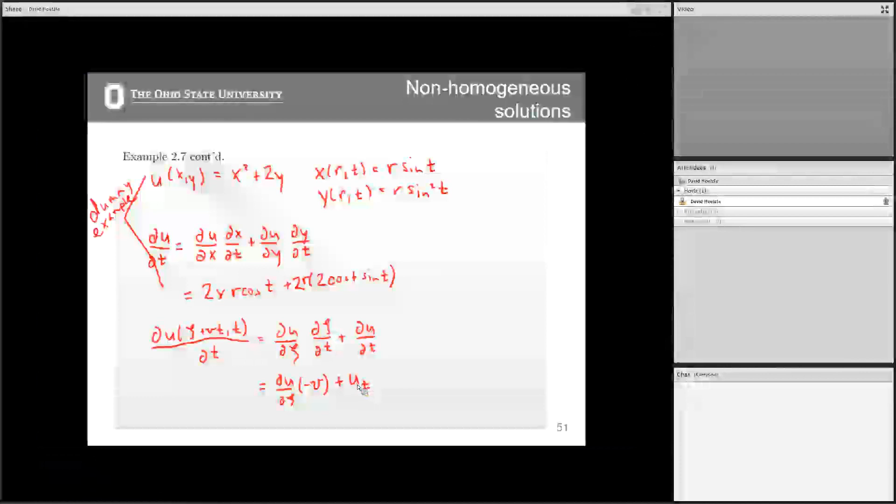And then we have partial of u with respect to t again. So partial u with respect to t now becomes partial u with respect to zeta times negative v, plus partial u with respect to t. Any questions about that?

Okay, so if we look at our partial differential equation again, this covers this term right here. We now need to handle this term, the second partial of u with respect to x. This one's considerably easier. If I look at this, it's going to be partial u, where u is a function of zeta plus vt, partial x squared. Sorry, I'm skipping steps here.

Let's do this just for the first one. The first time we do this, it's just going to be partial of u with respect to zeta, times partial of zeta with respect to x. If we go back to our definition, partial of zeta with respect to x is going to be equal to 1. So then we're going to get partial of u, partial zeta, times 1. This one's easier than the other one.

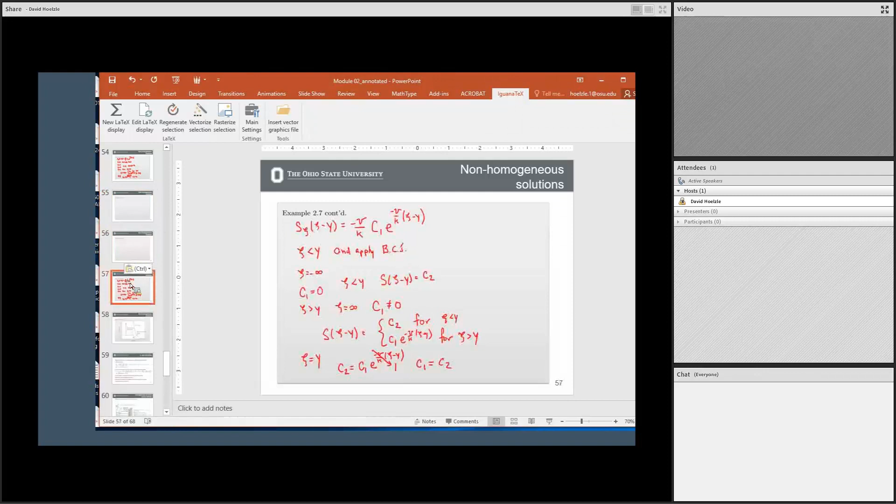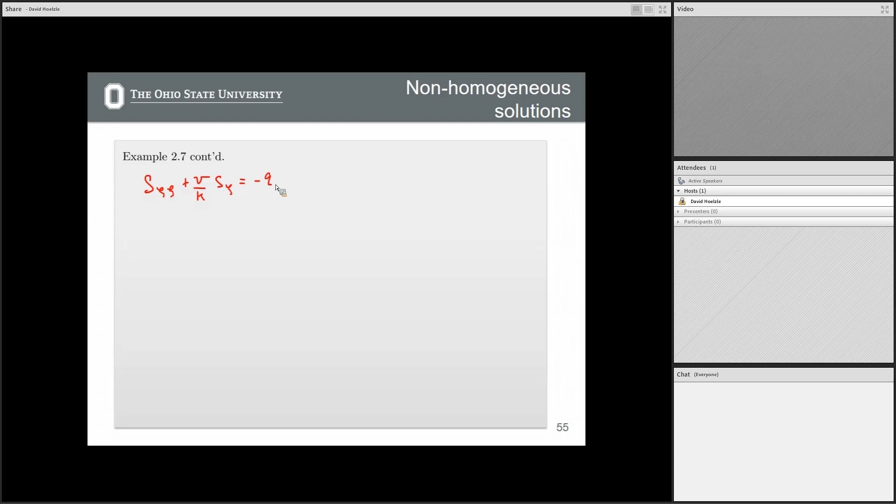Okay, so our original differential equation was this. If I integrate both sides over the infinitesimal width of my Dirac delta function, what I get is the limit as epsilon goes to 0 of these terms.

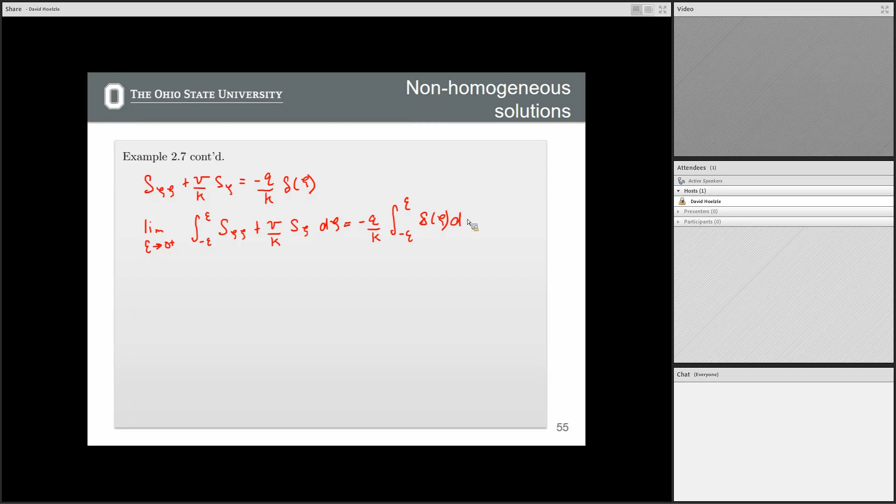So this may be some review for you - you'd have to go back to your systems classes in undergrad or differential equations classes from undergrad. But a fundamental property of the Dirac delta function is that the integral of this function, even if it's infinitesimally large, from negative epsilon to epsilon is equal to 1. So we know that this whole integral is going to be equal to 1. All right, so the right-hand side is going to be equal to negative qk.

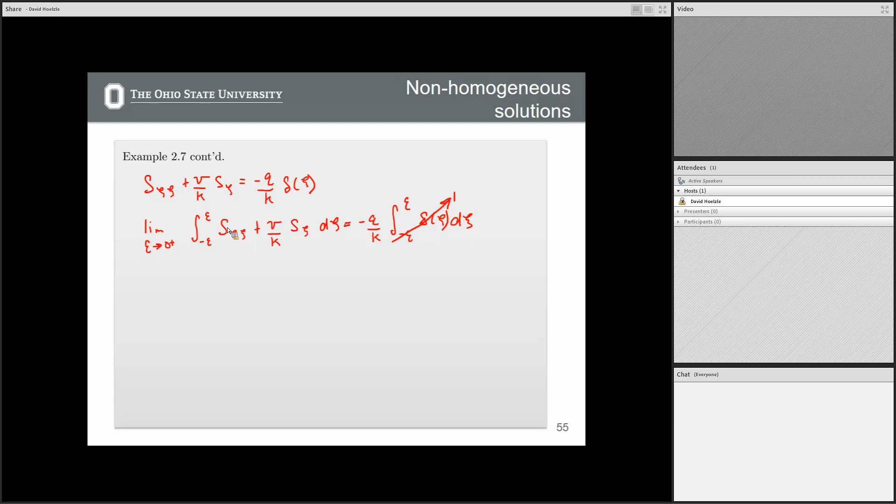Left-hand side, we can apply some basic principles of calculus. So we know that the integral with respect to d zeta, when we have a derivative with respect to zeta - here this happens to be the second derivative - but basically this is just the same as taking one of these derivatives with respect to zeta, right? Just like the fundamental theorem of calculus.

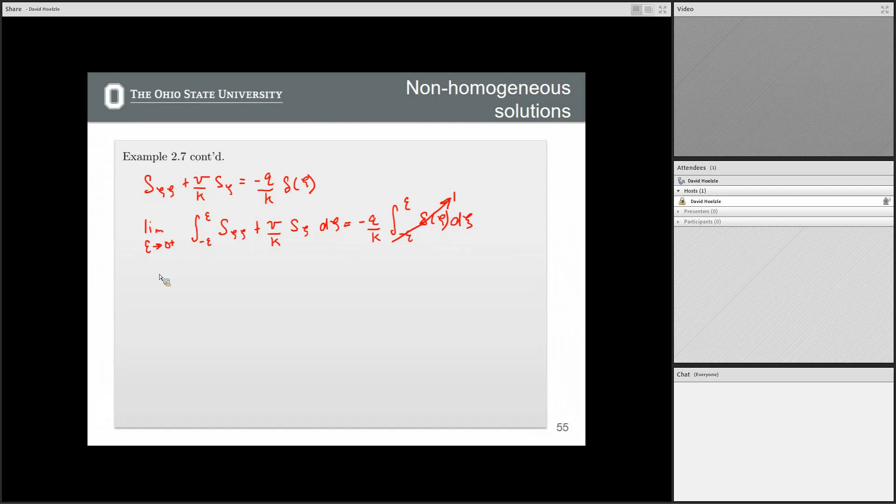So if I look at how I evaluate this, I now say limit epsilon going to 0. This term right here becomes s zeta evaluated at positive epsilon minus s zeta evaluated at negative epsilon, plus then vk times s evaluated at epsilon minus s evaluated at negative epsilon.

Okay, so going through these different terms here. So we know from the work we did in the previous slides, we already evaluated this for basically the partial of s with respect to zeta, and now we should evaluate this at epsilon, which is essentially 0. Right? So this is still limit epsilon going to 0, negative vk.

This is C1, right here. This one, right? So we said that for any time in which the argument of this function is less than 0, the function is just plain C2, right? So the function C2, taking a partial of C2 with respect to zeta is going to be equal to 0. That's just a flat function, right? So we know that this side here is equal to 0.

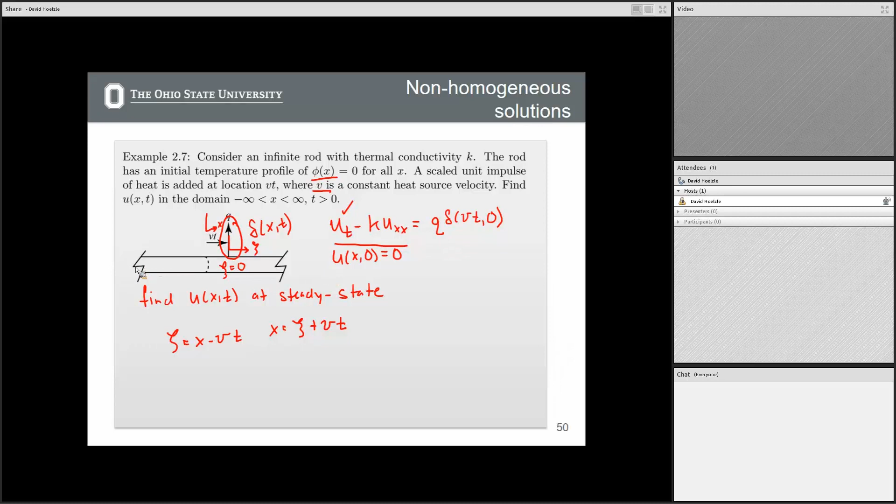So just going back, trying to map the problem to this: this is behind the heat source after the heat source passes, and this is all in front of the heat source.

The other thing to keep in mind is as your velocity gets slower, for constant Q, the heat taken up by the rod becomes higher, and therefore the temperature is higher, which makes sense. If you have constant heat rate and you're moving along slower, it's going to heat up the area for a longer period of time. So this is increased rod temperature as the velocity slows down.

It also allows heat to diffuse forward a farther distance. Whereas if you're moving really, really fast, the area of the rod doesn't heat up as fast because the amount of energy per unit time going into that area is lower, and there's also a faster decay in terms of how heat propagates in the forward direction.

We'll directly see the implications of this for the paper we're going to talk about, and we'll see this again when we get to powder bed fusion processes and other additive manufacturing processes as well. Any questions about this problem?

Yes? Translating this - is it typically a higher velocity or lower velocity when you actually apply this? Is it because of the material you're trying to process? Yeah, so it's very dependent on the material.

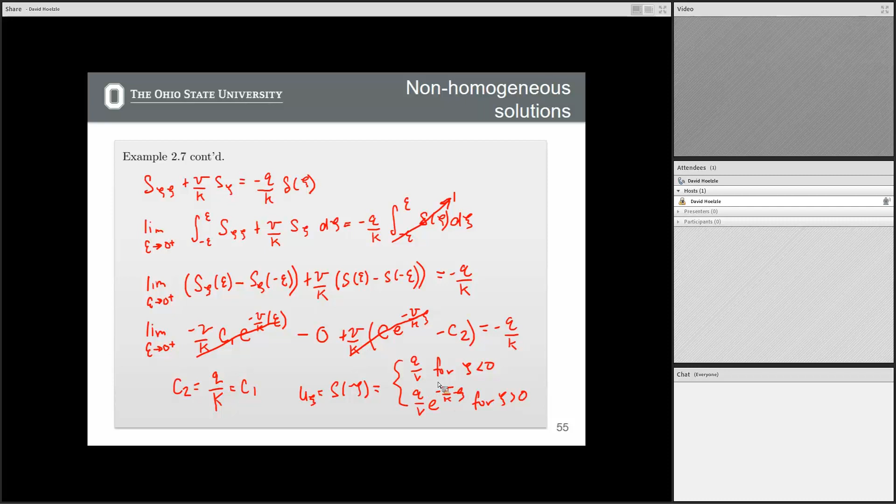This right here, I'm not showing the change or how this temperature response changes with Q, because that's a very linear relationship if we go back to the equation - the height here is linear in Q. It's not so nice and clean when you look at velocity, since velocity in terms of the decay rate is in the exponential, so that's a little more difficult to plot, so I plotted that one.

But basically your two knobs are going to be the power of your laser, which is your Q, and also the velocity at which you scan your laser. So they're the two main things you can control. There are other things you can control, but those are the main things that technicians and engineers in additive manufacturing look into.

All right, so this is the 1D problem. But when we're doing additive manufacturing, we're building three-dimensional parts, right? So we have to get into higher spatial dimensions when we talk about PDEs. Here's the diffusion equation for higher spatial order.

It looks very similar - you still have this term the same. This term becomes a little more complicated: instead of having the partial of u with respect to x squared, now we also have terms in the y and z direction, and we can have non-homogeneous terms in x, y, z, and t all included here. Our domain, if we're talking about the infinite domain, which is what we were discussing for the previous problem, you can see the domains listed here going from negative infinity to positive infinity for each. And then we can also specify initial conditions for the temperature in x, y, z as well.

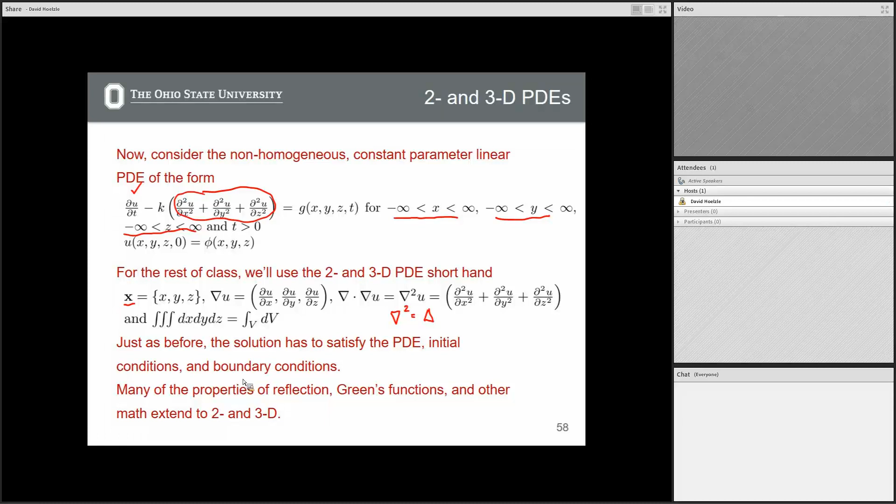Just as before, the solution has to satisfy the PDE, initial conditions and boundary conditions. Some of these ideas that we talked about in one spatial dimension, we're going to use these in 2D and 3D for additive manufacturing processes as well, and I think they'll become a little more clear. I'm going to go through two examples in 3 dimensions that I think will help solidify this idea.

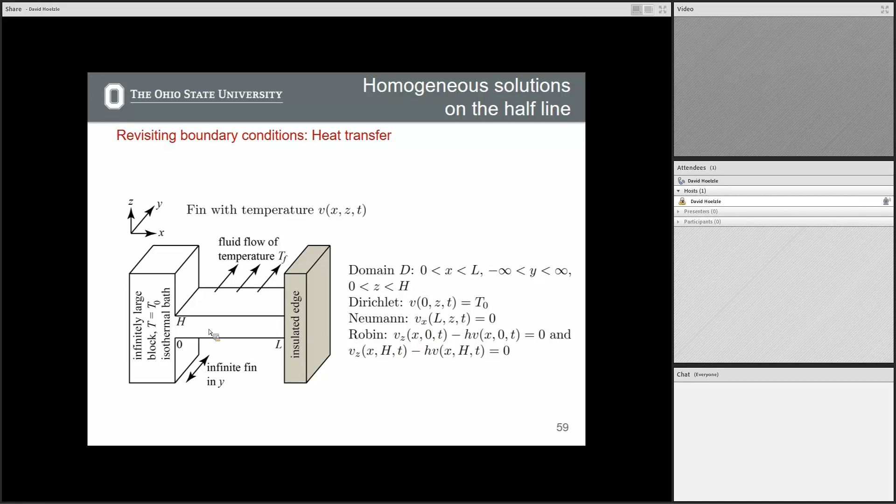Boundary conditions for heat transfer. This is a slide that we have seen before already. I showed a simplified version of this. This is basically a repeat of that. I don't think there's anything new, but you have to consider boundary conditions, and we're going to start with this example here.

This example is very similar to the one we just looked at, but there are going to be some differences, especially the form of the Green's function. We're not going to derive it like the previous example. Here we're going to take it from a table, or basically the previous work, but you'll see how this can be applied.

So before we consider the infinite rod - no infinite rod exists, this is probably even more abstract - we're going to consider an infinite body, which I'm denoting by this cloud. Picture you have this infinitely large block of metal, and somehow you're able to put a heat source somewhere in the middle of that block of metal. Probably not too realistic an example, but it's going to be instructive for when we get to a more realistic example. So anyhow, infinite block of metal in all directions. That means our domain goes negative infinity to infinity in the x, y, and z direction.

This heat source, again, is moving along the x direction with velocity vt, and it's not moving in the y or z direction at all. So if you look at our coordinate axis, this heat source is moving along the x direction, and we're trying to understand what is the temperature inside this block of material.

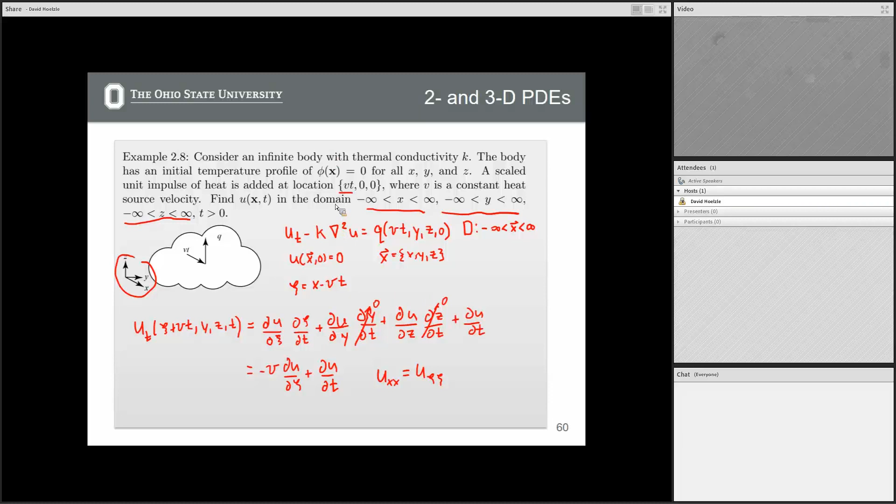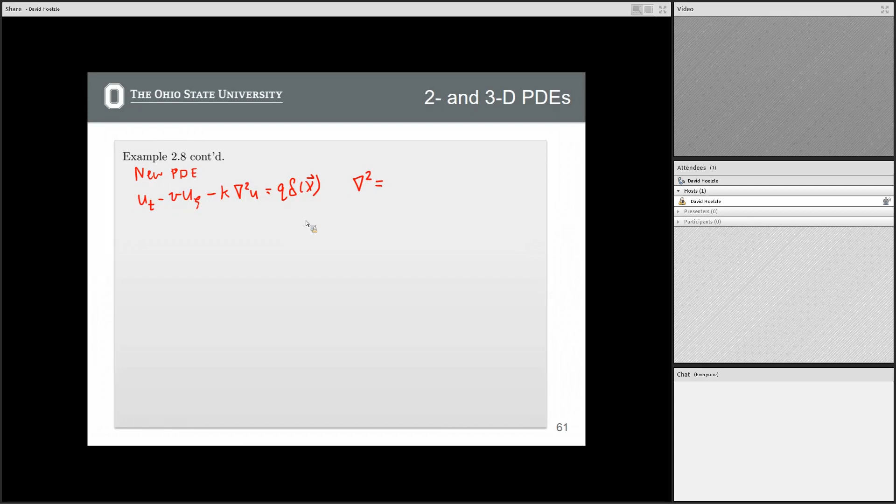So our new PDE is going to be this. We have to redefine what we mean by the Laplacian squared. So before we were in the coordinates of x, now we're going to be in the coordinates of zeta.

Our triad of spatial variables is going to be now zeta, y, z. And then our domain is still infinite in all directions.

The derivation of the Green's function for this is, let's just say it's not easy. So we're going to actually use basically known Green's functions, from tables of known Green's functions for this. The notes, the handwritten notes, are going to have a demonstration that this is indeed the Green's function

for this type of partial differential equation. But I'll cut to the chase on this, is that the Green's function for this, because the main part of this example is not this exact solution, it's the next one I'm going to show. But the Green's function for this is this equation.

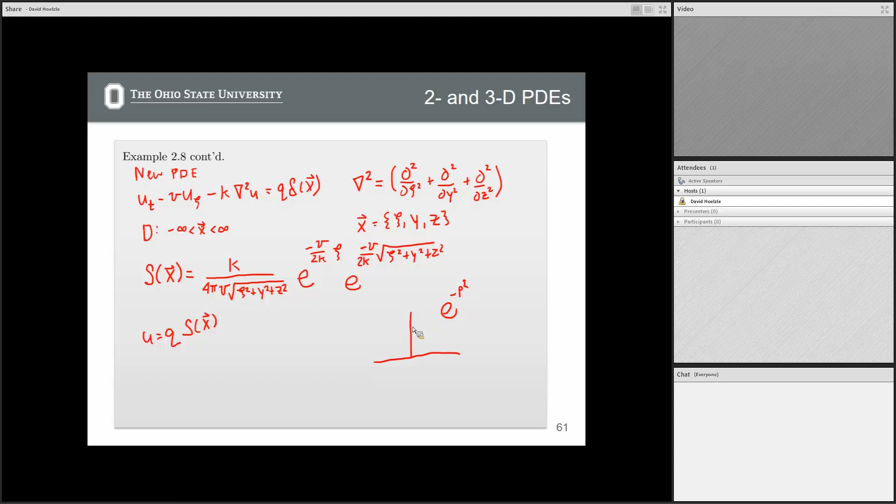So some interesting things to think about here. For those of you who have seen multivariable Gaussian functions before, if we have just a single variable Gaussian function, we're usually talking about, say, e to the negative p squared. That's a function that looks like this, right? If I have e to the negative, say, r squared, where r is the distance from the origin,

then we have functions that look like this. These are two-dimensional Gaussians, and then we have to project this into 3D if we want to look at what is a three-dimensional Gaussian, right? So which is exactly what we have here. So these are essentially spheres of

level sets in terms of temperature here. So the main thing I want to point out is that this is symmetric. This term here is symmetric about the origin, essentially in all directions. This term is also symmetric about the origin in all directions as well in the denominator, right? Because they're equally balanced in zeta, y, and z. Where we get an asymmetry is because of this term right here. We'll see how this manifests itself in a second.

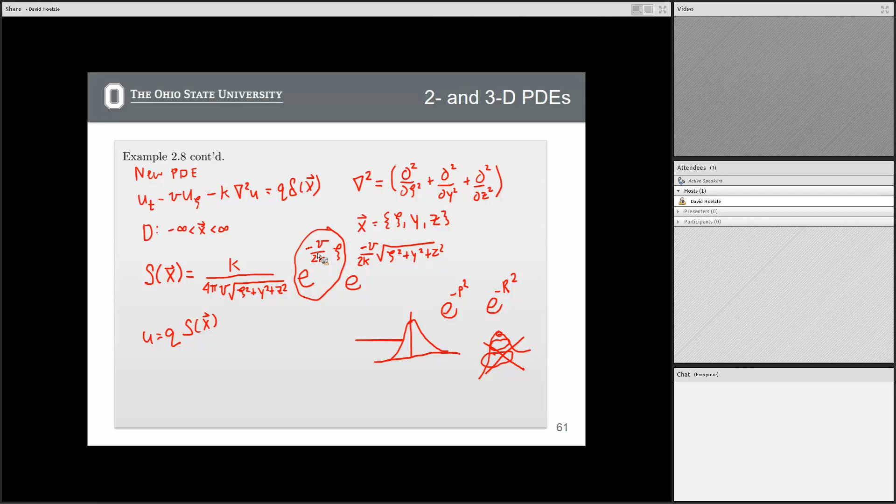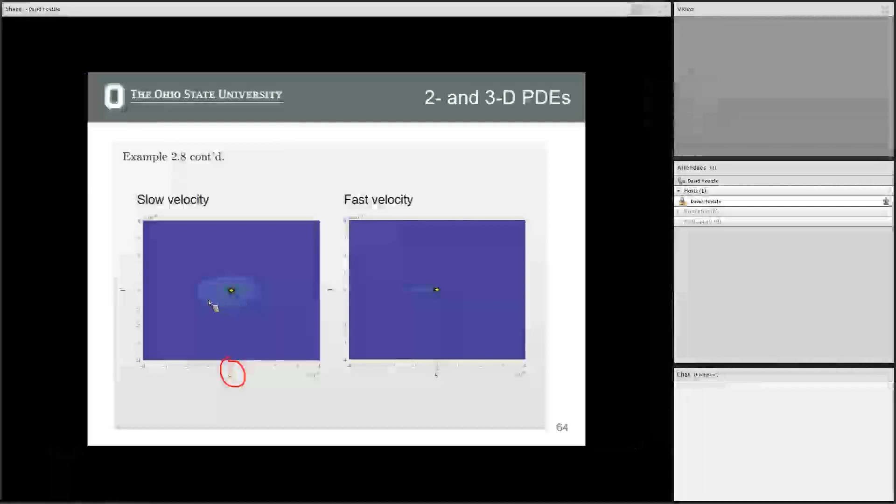Okay, so as we get into 3 dimensions, it's going to always be a little bit more difficult for me to plot and demonstrate, but this is a tool we can use. This is using, I forget all the code for this, it's on Carmen. I'm forgetting the exact name of the MATLAB plot that gives you these contour plots.

You can use MATLAB to create contour plots of any function, in this case a 2-dimensional function. But the main thing I wanted to point out is this is what, as we get into additive manufacturing processes, this is the type of temperature profile we'd expect for slow velocities. This is more what a fast velocity temperature profile looks like, where all the high temperature areas are trailing the laser spot.

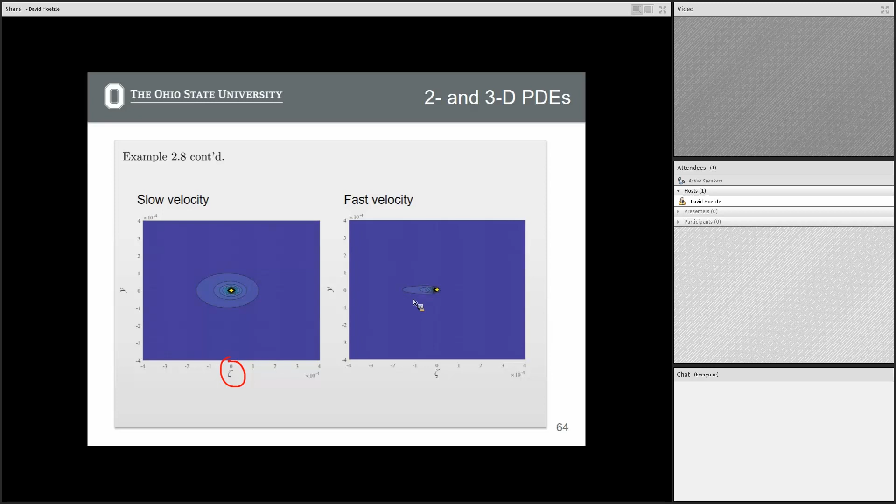Okay, we don't have time to get to this example. This is actually more physically relevant for additive manufacturing. This is in the half plane. We'll actually talk about this when we get to the journal article we're going to go through, because this exact solution is given in that journal article. This is the half plane, much more relevant to something we actually see in a manufacturing process.

This would be something that is never exactly true, but it can be approximated. We're saying that the domain goes infinitely in the x and y directions, and then we're scanning a heat source along the top of some surface of a really thick plate of material. So this is the infinite half plane here, where the domain in z goes from negative infinity to 0, and we'll go through this essentially in the journal article after we take a break. So let's take a 5-minute break, and then we'll get into the journal article discussion. We'll reconvene at 10:55.

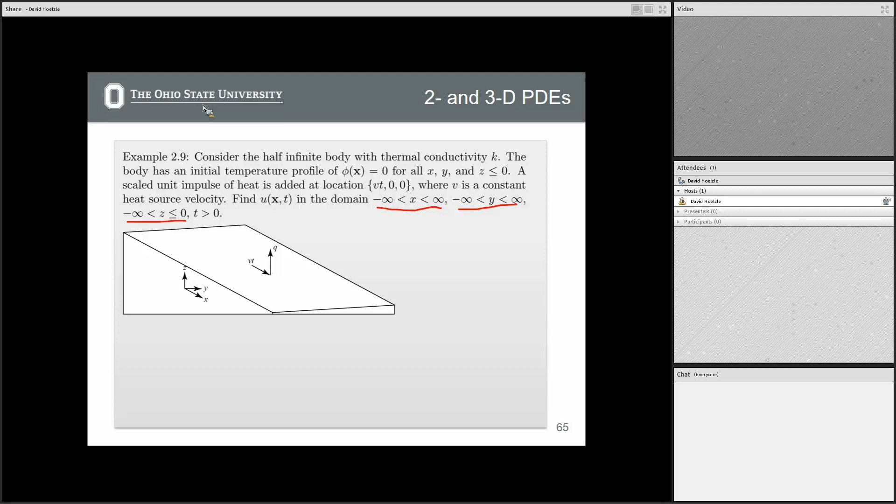Yes, you see my name on the poster list and everything. Did you actually go to the online site to register and say what you want to eat and all that stuff? I thought that was taken care of because I have my name registered for it. Oh, I didn't realize you could put the name on it before that. But you received the emails asking you to register, right? Yeah, but they said anyone who hasn't registered, register now. I thought it was registered because my name was on the poster list. Never mind that, I'm gonna do that.

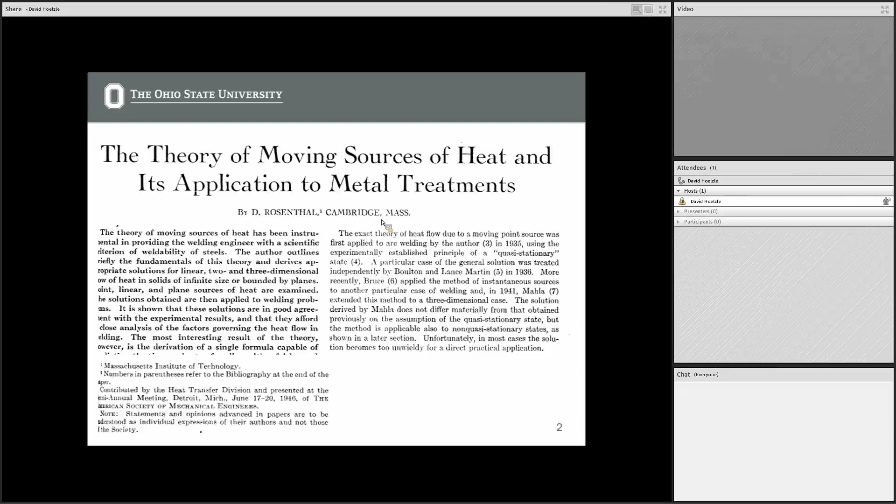So that makes it somewhat amazing they were able to do some of these things. I'm going to go through this, and in terms of a model for when you present these papers, you can't present an entire journal article in 15 minutes, it's just not possible. So try to select a subset that you think is really interesting to you, or that's really interesting or applicable to the class.

That's what I tried to do here, looking at the cases of 1D heat transfer, which directly applies to the problems we just looked at, and also 3D heat transfer, in particular what's called the method of reflections, which I was hoping to get to before the clock hit 10:45, but I was unable to. We can go through it here though, it's a fairly simple idea.

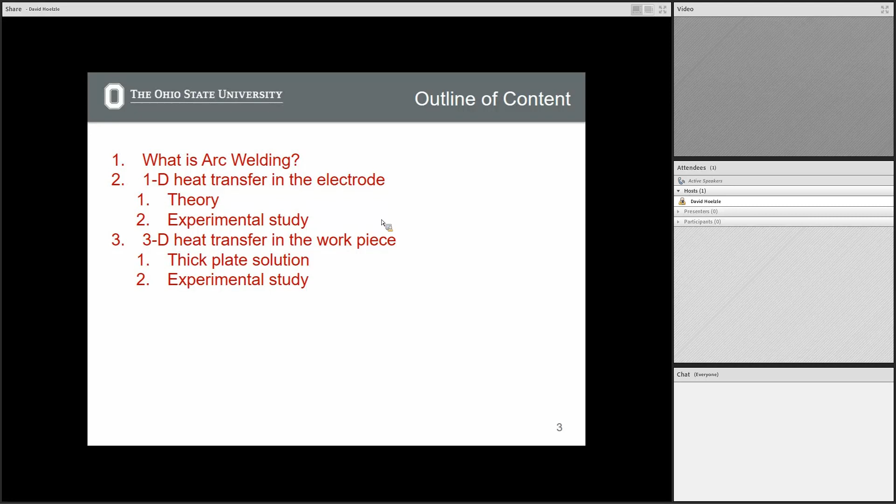So the first thing to understand is, what is arc welding? Has anyone welded anything before? You have? So two people. Was it arc welding or a different type of welding? Arc welding, okay.

Do the flux? Someone holds a filler for you? Oh, so it was like a separate bar coming in and you were welding it to the side. Okay, so that's a little bit different than what this video shows.

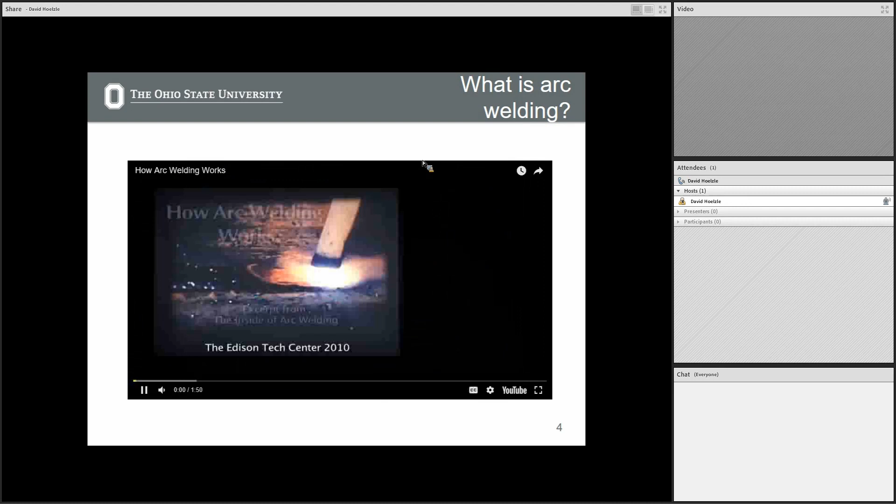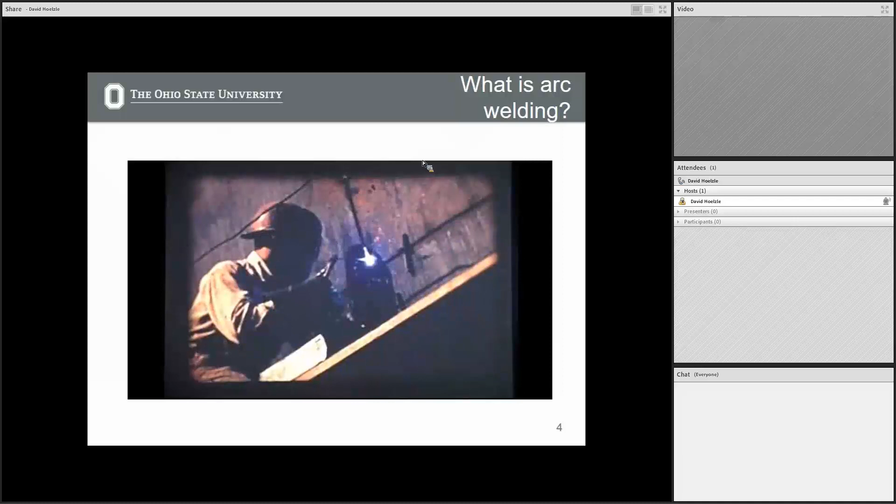Let's see, just going to go. Problems with volume and all these things. Still not good. Okay, so I'll talk through what's happening here in terms of arc welding.

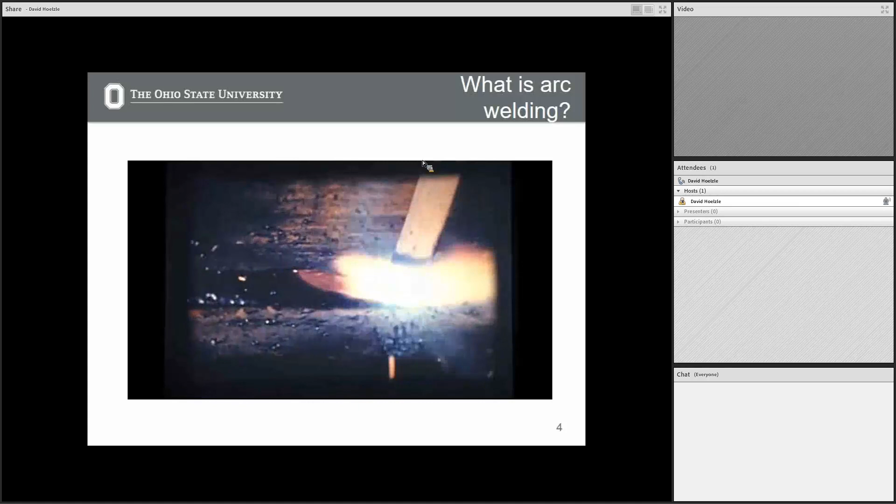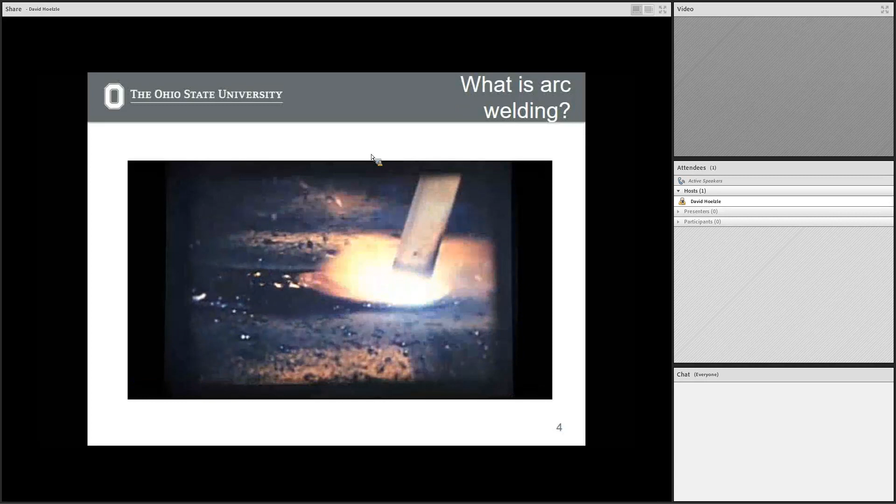This is an arc welder, maybe you've seen this with people on construction sites doing this. What's going on is you have a consumable electrode right here, decreasing in size, as you can see in this cartoon. You have a current running from this electrode into this plate, creating an electrical circuit. You get arcing of basically ionized gas between this consumable electrode and the piece, and so the electrode is continually melting, putting molten metal onto this workpiece, which is also being melted because it's so hot. You see this pool of metal then forming where you're welding.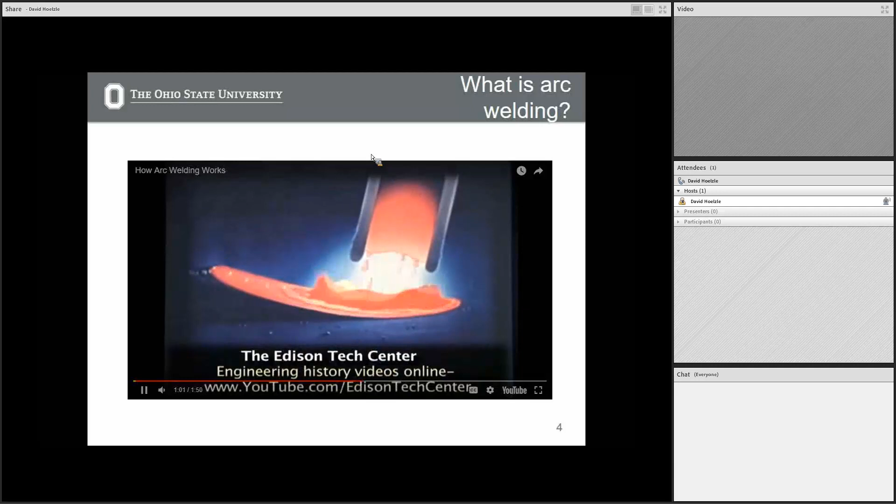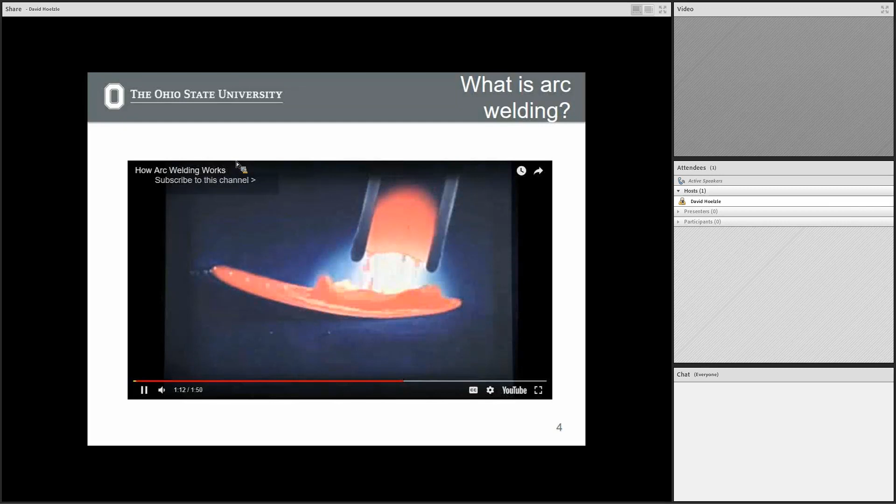If you've ever looked at a weld, you'll notice it almost looks like a bunch of ellipses stacked on top of each other as you go along. That's because you get these wave patterns of flowing molten metal, and it freezes in that regular pattern if someone's making a good weld.

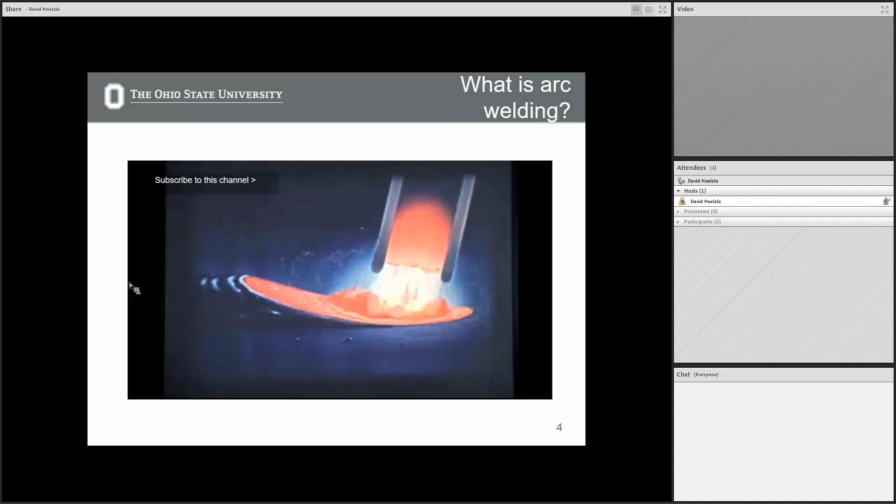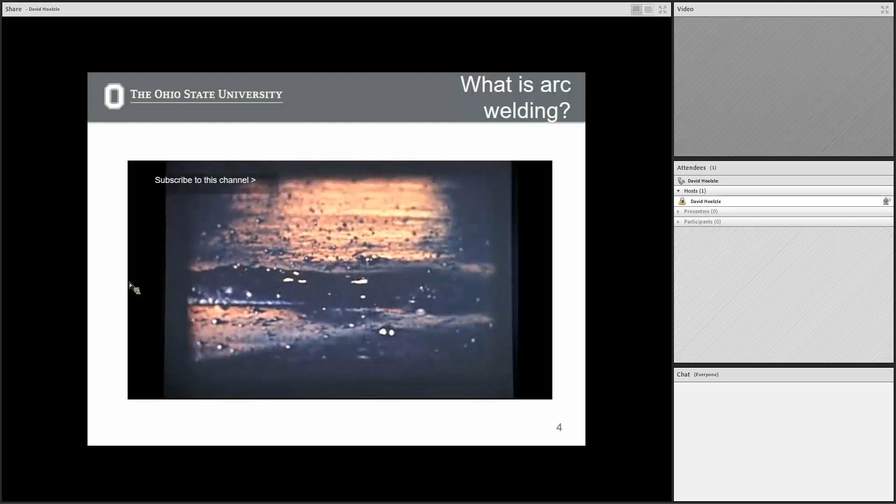Have you welded a lot of things before? Not that much, out of a car. Oh, out of a car, okay. It's much harder than it looks. Yeah, the piece of it's hard, you've got to have fine control of the distance between your workpiece and the electrode. Yeah, I hear it's much harder than it looks, I've never done it myself. It's funny, as you talk to welding engineering professors, they're all scientists, and the ones who think they have street cred brag that they can strike an arc, even though I don't think most of them can actually weld themselves. Yeah, I hear it's very tough, I've never done it, but that's the main process.

Of the main idea, I'm by no means an expert in welding, but this is just to give you a sense of what's going on. You electrically ground the workpiece that you want to arc weld. This is then the power source, which is connected to the electrode holder, and this is the consumable electrode. So you're continually feeding a piece of metal that is designed to become part of the weld.

Looking at what's happening here, you have your electrode, which is covered by basically the flux, which when this melts creates a gaseous shield. The reason for this is because if you didn't have this, you would have a pretty intense oxidation of the liquid metal, and that causes poor mechanical properties. So you would have the same exact problem in additive manufacturing processes if we did not have some sort of gas surrounding it.

So that's why a lot of additive, especially metal-based processes, are in inert environments. They're either mostly in argon gas, or some of them are actually under vacuum. So the solution for welding is they create this material outside that melts and then creates this gas shield to prevent oxygen from getting to the surface before it solidifies and creates oxidized surfaces.

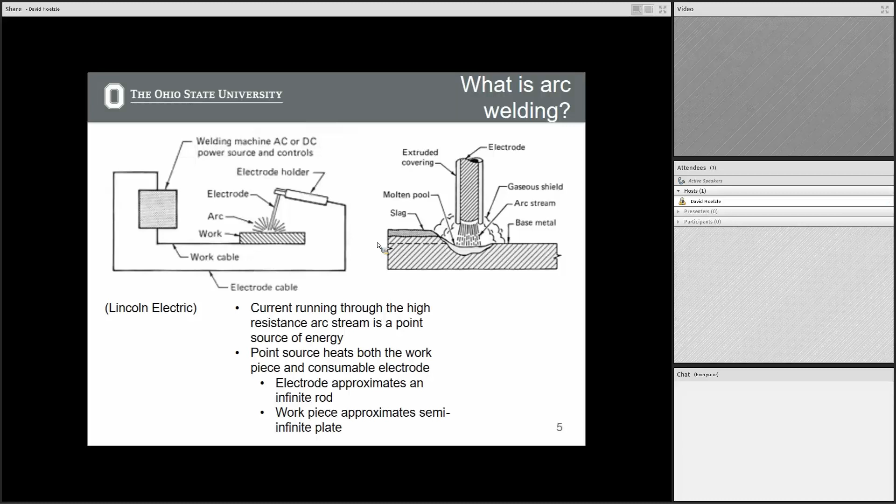Okay, so the first problem here is they're looking at essentially temperature in this consumable electrode. So you have a heat source right at this junction, and then they're looking at how temperature is propagating up this electrode as it's going in.

So ignoring the plate here, the assumptions they're using are that the electrode is long with respect to the diameter, and quasi-stationary—meaning the electrode is moving at a constant velocity, which maybe if you're a really good welder, you want that. If you're a bad welder, maybe you don't have the ability to hold that true. No surface losses—they're saying that the heat coming from the sides is going to be equal to zero.

And then no Joule heating. My naive understanding of Joule heating is I didn't understand this assumption one bit. Joule heating is basically heating that comes from current running through an electrical resistance, and to me this is exactly the definition of Joule heating. The way they eliminated the idea of not having Joule heating is that they said this is a solidification temperature here—whatever the solidification temperature of the metal is—and then this is the hottest temperature right here. So instead of assuming there is some sort of heat source, they said there is just a temperature gradient, and there's no Joule heating, so that all the heat transfer is coming from the fact that you just have two different temperatures. This assumption had made no sense to me at all, but these people are dead, so I can't go argue with them.

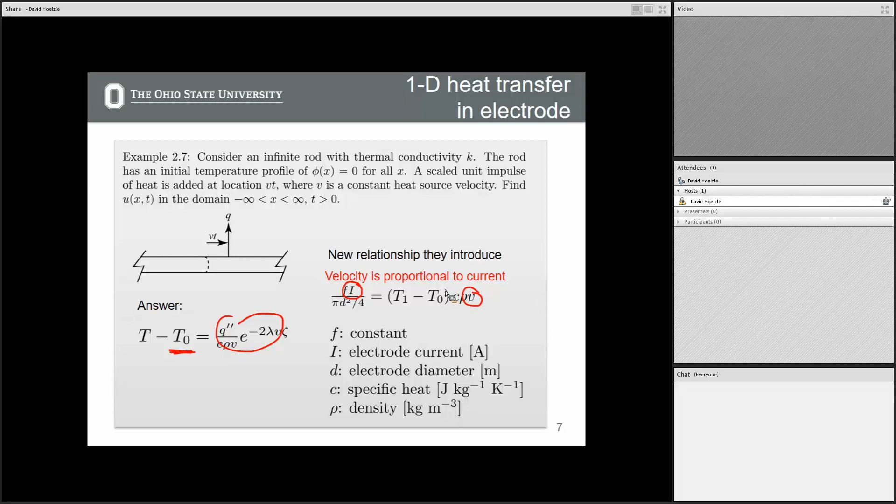This ties back to some of the plots we had before, where we said that as the velocity decreases, the temperature increases.

Before I read this paper, if you asked me where you'd see more of what's called the heat affected zone—where the metal actually physically changes—would it be in the case of 240 amps or 145 amps, I would have expected that to be 240 amps, because you're basically having higher current density.

That's why I think equations like this are fairly instructive in explaining this phenomenon, because what this is basically saying is that if you want a good weld bead with higher current, you have to be traveling faster, and that means the heat affected zone is smaller.

So the heat affected zone, in brief words, is the region in which you get appreciable change in the microstructure of the metal you're working.

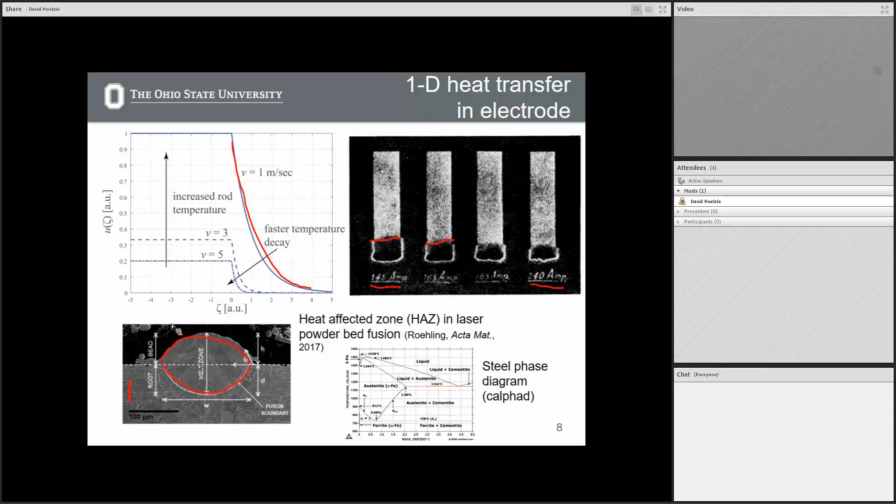The next thing I thought was interesting is they started to look at 3D heat transfer, and what I thought was most interesting for this class is what they said about butt welding in thick plates. For those who have never heard of butt welding, you take two pieces of metal and then put a weld along the seam to basically turn two pieces of metal into one welded piece. So their assumption is that they have no heat loss through the surface.

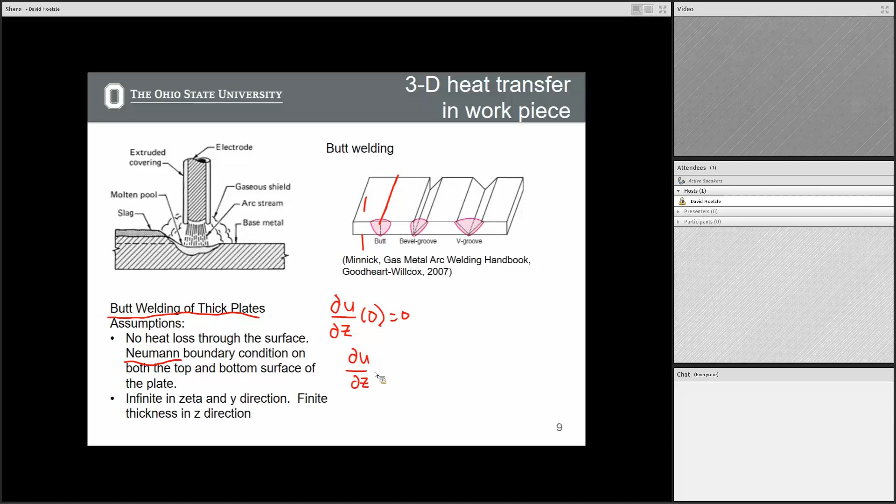What they're saying is that at this surface and in this surface, they have what's called the Neumann boundary condition, which we talked about. That means if we look at the partial of U with respect to Z at the position of 0, that's equal to 0, and then the partial of U with respect to Z at what they're calling G, or actually negative G, that's the bottom of this—they're saying that's equal to 0 as well.

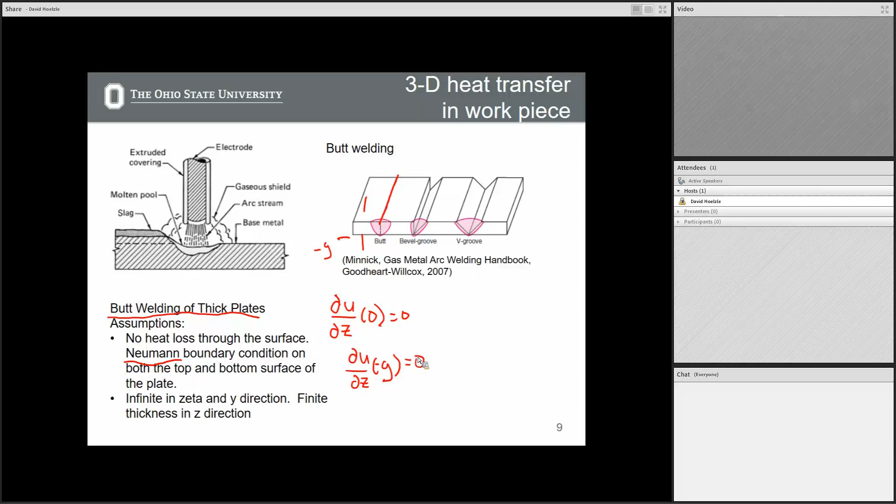All right, so I didn't get to go through this problem, well we got through this one essentially. This problem was motivated by one of the solutions they looked at. They looked at this case of this really unrealistic idea of having heat in the middle of an infinite volume, and they got to something more realistic: heat in a semi-infinite volume, the half plane.

I didn't have a chance to go through this, but I wanted to point out the main difference here. The only difference between these two is this 4, or I guess this 1/4 coefficient, turns to the 1/2 coefficient.

Intuitively, you can think of this as the temperature in the infinite half plane being larger than the infinite plane in the domain you're talking about, because heat no longer can flow in this direction. Heat has to go somewhere, it has to now go in the negative z direction, where here it could go in all three directions. This can still go in the x and y direction here, and this is based off the methods of reflection.

So if we look at the case, we went through these situations of temperature profiles in infinite rods, and then we looked at an infinite half rod, and using the methods of reflection, we just saw that that was basically just doubling the amount of heat in the system because we can't have heat transferring across that plane.

Same idea here. Now this gets more complicated when they talked about this situation. So this is infinite in the y and x direction, and it's finite in the z direction. So our domain goes from 0 to g here.

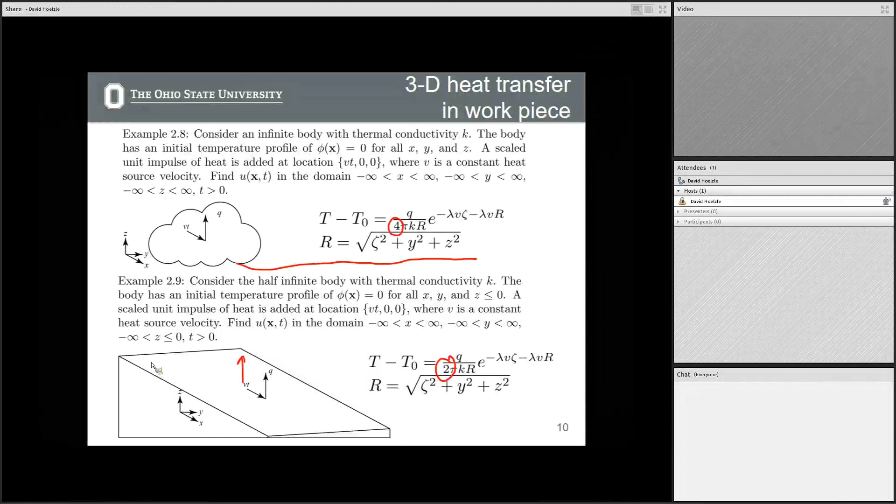Okay, so that would be the infinite half space. That would handle essentially this case, and this would be an even extension in the z direction here, to understand this one. Now this one's more complicated because we have a plane of reflection at z equals 0, and now we have another plane of reflection at z equals negative g. All right, so the way this is done is if we look at...

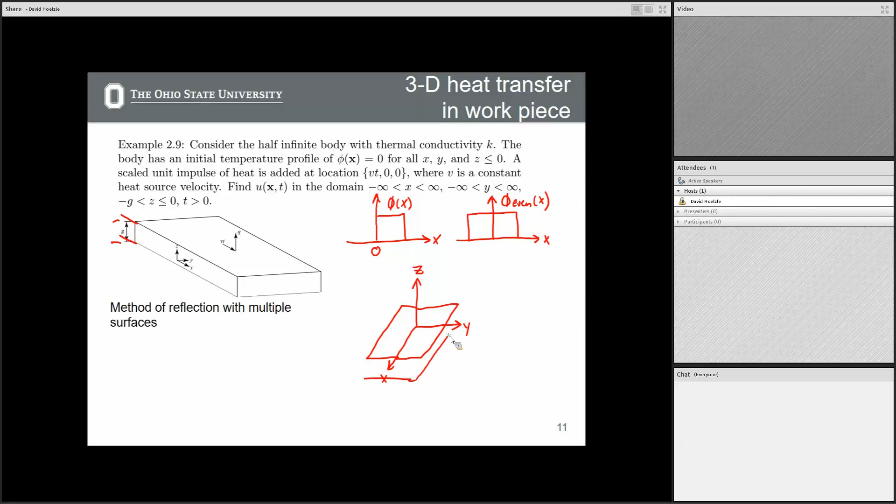And so looking at just the z direction, right, because we only have reflection in the z direction, if we said that we had some initial condition for our temperature profile, and we do the even reflection here...

That'd be this, and then we have, again, this infinite set of reflections at 2G, and then of course in this direction as well, at negative 2G. So what we're setting up is, to solve this, we're setting up this infinite set of mirrors to take this finite domain in Z and turn it into an infinite domain to make this work.

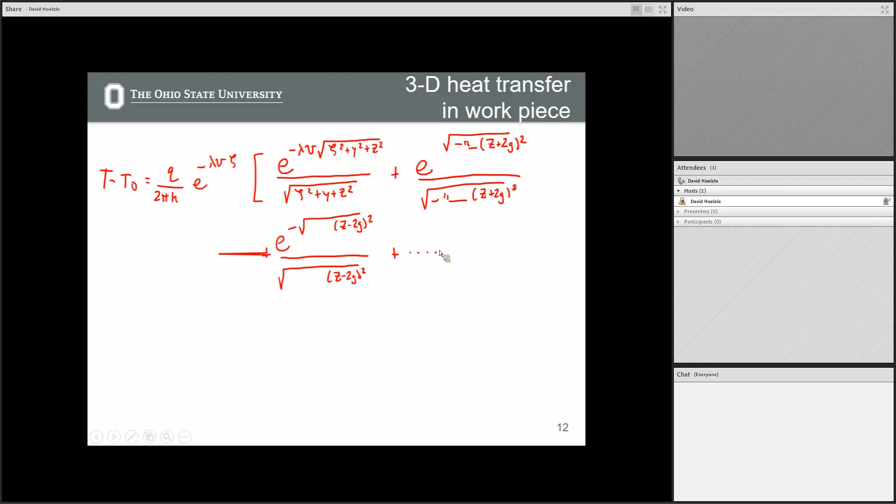Okay, so then the final solution is—so again we have an asymmetry in the zeta axis. This is the axis in which the heat source is moving, and then we're going to have an infinite summation of these terms.

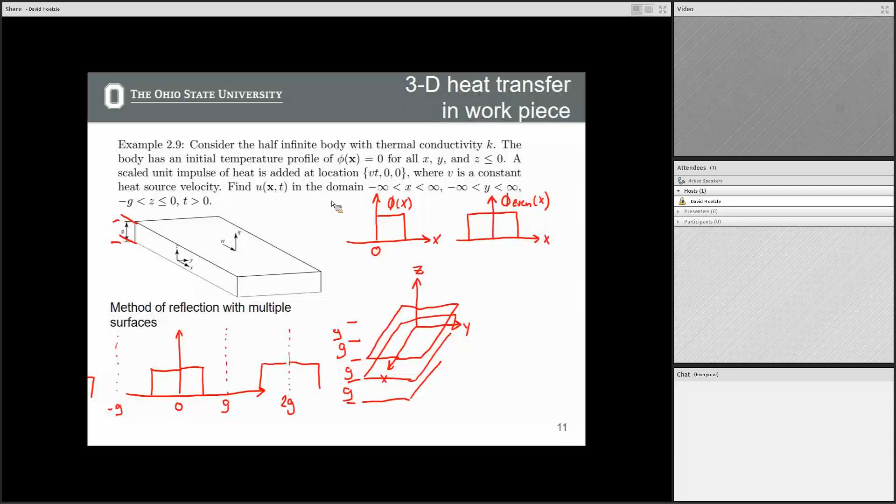I can't say I have a good answer for you on that, in terms of why that is from a PDE point of view. Having taken a single PDE class myself, I know that's the answer. The simple answer, I guess, to keep in mind is that if we just had a single mirror, we would not have the Neumann boundary condition at G. Right? If we look at the solution.

Trying to think how to best explain this. This is definitely going to have a Neumann boundary condition at Z equal to 0. This right here, I'd have to think about that. We'd have to take the derivative with respect to Z here, take this derivative first and evaluate it at Z equal to G, or negative G, to see if this is true. I'd have to think about that.

Also, is it true that we would add these reflection planes here as appending terms to the Green's solution? Yes, I noticed that's what ended up happening when we ran the 1D case. That comes from the fact that we're basically changing the reaction to initial conditions, so we now need to reflect those initial conditions, even if all those initial conditions are equal to 0.